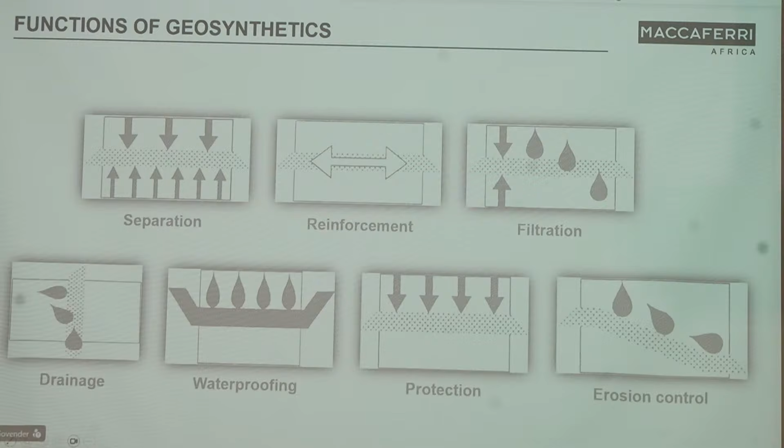We need to understand the function that is required, and the function would allow us to specify the minimum characteristics required in a tender document so that the contractor prices accordingly.

When we start looking at filtration, we then start looking at the permeability, and we're looking at the opening size.

On the technical data sheet, if I go back here, you'll see that each product supplied by any supplier should come with a data sheet with the specified norms in terms of it. Part of that, of course, is the component we've been seeing in tender documents all the time, which is the mass per square meter.

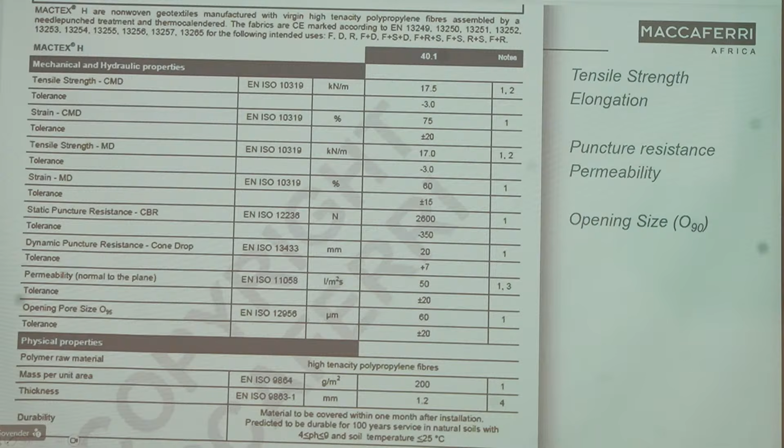I hope this helps you understand that merely stating the grams per square meter is not enough when doing a specification, talking about the textile.

The method of measurement is square meter. It's not roll, it's per square meter, not per roll.

You want to take out all the ambiguity when you're trying to specify your material. The basis of the payment - what are you including in it? Is it just the supply and not the placement? You define that as well.

And then in terms of the bill of quantities, how do you specify it in the BOQ? Geotextile for separation, as shown in the drawings, in square meters. That's generally what we do for specifying geotextile materials.

Hope that makes sense. Now, I've gone into a little bit of detail on this one. All other products, I'm not going into this amount of detail, but I'll just highlight the technical requirements for each component. So, a first example for you now - take out your phones.

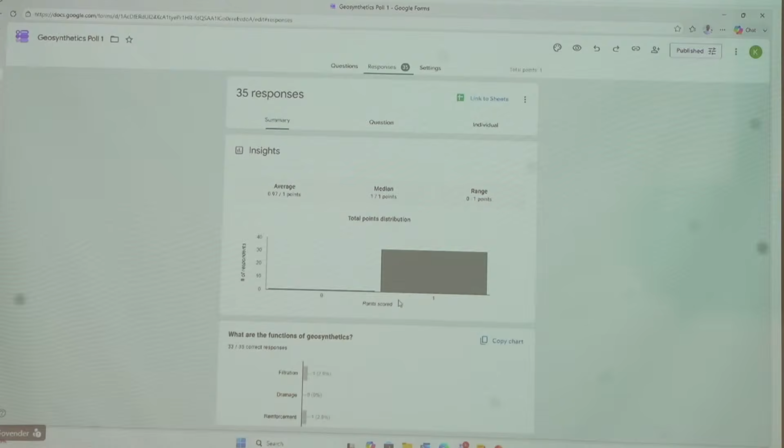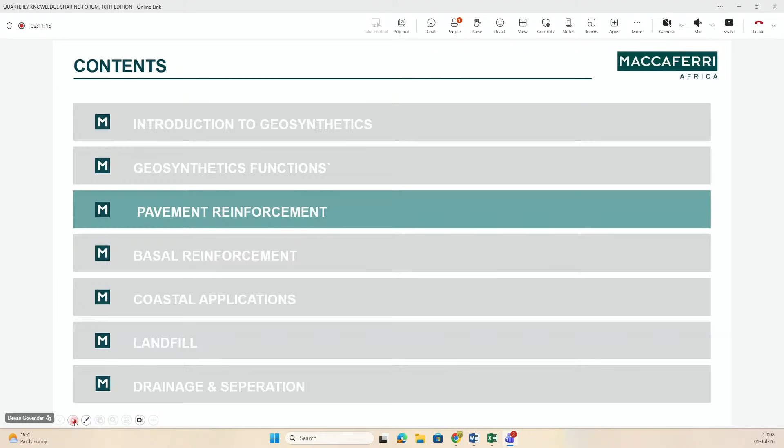Now that we understand the functions of geosynthetics and we understand a little bit about geotextiles, we're going to get into a key area for yourselves, which is pavement reinforcement. And when we start talking about pavement reinforcement, we can talk to separation, we talk to reinforcement, and we talk to drainage.

Now, when we're talking about a pavement, there's a number of courses that we're looking at. We've got the wearing course, the binder, the bituminous base, the base, and the sub-base. When we're talking about the wearing course, we talk about treatment, and there's a couple of solutions we could utilize. When we get into the base, this is where we're going to try and distribute that load. And when we're distributing that load, we're going to do that through reinforcement. Where we have a problem with water coming through, we can also start looking at separation and drainage solutions as well, which I'll mention as we go through.

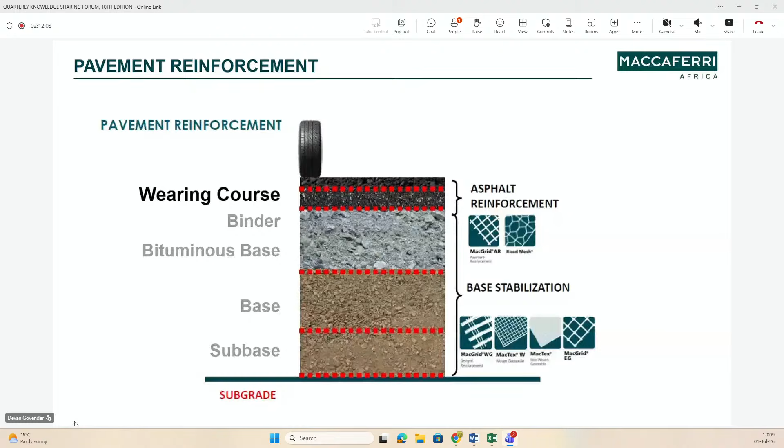So let's start by looking at that wearing course and what we can do in the wearing course. Now, that wearing course is meant to distribute that load. The other thing to happen on that wearing course is we need to make sure that it's sealed, so we get no cracks propagating up into the surface. Now, on the surface layer, it's a regular surface, it's resistant to vehicular loads, and it's got to be waterproof.

And when we get into the subsequent layers, generally on the base, we're starting to look at gravel, and there we're starting to look at the real load distribution. There needs to be good drainage as well in that area so that we take all water that's coming through from the top as well as water coming from the bottom out.

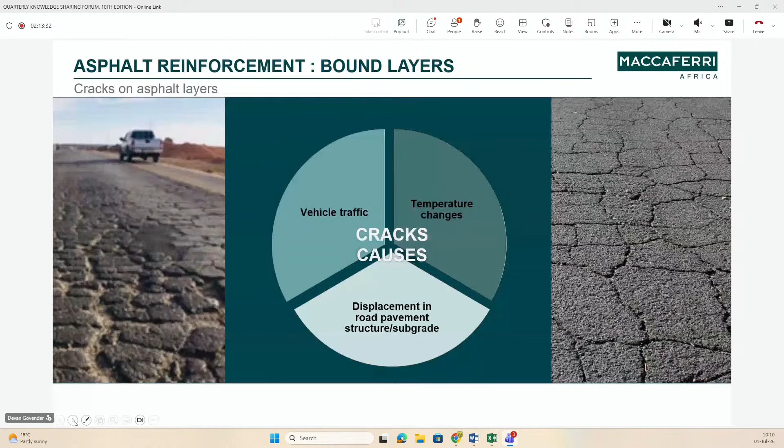Now, if we start looking at those bound layers, one of the key challenges with the bound layers is the cracking of asphalt layers. And across Africa, and I've worked across Africa now, I can tell you that this is a common space where we put down these beautiful roads. We've got this asphalt pavement, and then after some time, we're starting to get cracks. And cracks can happen for a number of reasons. They happen because of traffic, because of temperature changes, and because of displacement in the road pavement substructure or the structure. Now, when we apply a geosynthetic, we increase the service life of the pavement by preventing fatigue.

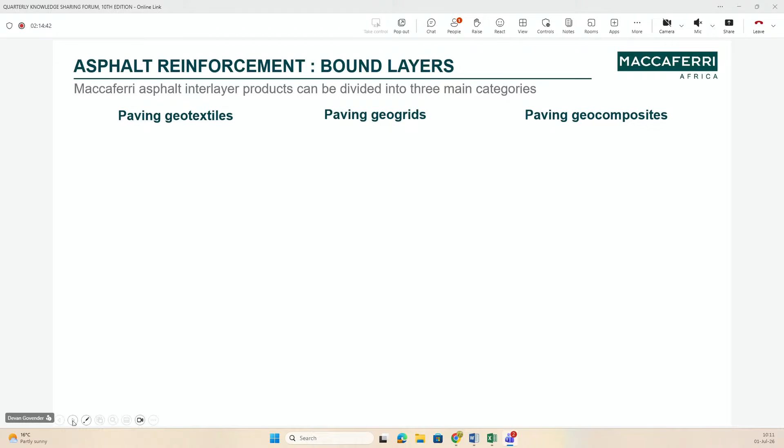Just moving forward. In terms of asphalt interlayer products, they can be divided into 3 main categories. Now, one of the things that we want to do with the pavement layers is we want to put in geotextiles that can be impregnated with bitumen. Now, when we do that, we allow for an impermeable layer. So as opposed to just putting a seal on the surface, we're now looking at putting in a bituminous barrier that can both provide stress relief and act as a barrier.

Then when we start looking at the pavement itself, we can actually improve the modulus of the material by putting in a grid into that material. Now, we've got to understand when we're working with these particular grids, if you're working with asphalt, you're working with high temperature materials. So our material has to be able to withstand those temperatures.

Now, when we look at the grids that are offered by Maccaferri, we combine both these functions. We could offer it just as a pavement material, so just a geogrid component, or we can combine both to offer what we call a geocomposite, combining the grid and the geotextile to give us both. If you want to use it, you've got it for sealing as well as for reinforcement.

Now, in those bound layers, this is where the challenge comes in. So you've got your layer works, but in there, if you've got any cracks, because you're going to have tires moving across the surface all the time, any crack that propagates is going to go into the surface. By introducing a geosynthetic into that layer, what we're doing is we're stopping the crack from propagating onto the surface.

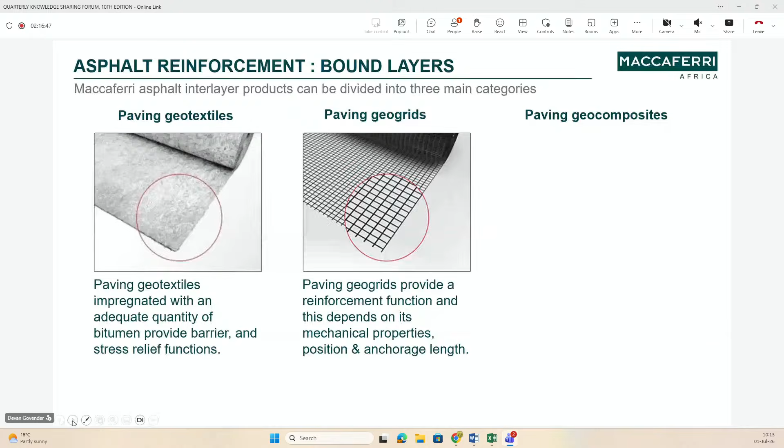Now, when we start looking at that material, we have woven geogrids. Importantly, we are talking about grids that are made from glass fibers, which can be used in asphalt layers that are about 35 millimeters. Now, they have a very high stiffness. The characteristic of the material is it's got to be stiff so that when you have deflection of that pavement, it reduces deflection. So it's still flexible, but it's reduced.

There is enhanced bonding if it is with a geotextile, because it is then impregnated with the bitumen. The advantage is that it reduces deformation, it reduces asphalt layer thicknesses by 10% and increases the service life by 20 to 30%.

An alternative product is also a steel product. So it's where we take our double twist wire mesh and we insert some rods into them. This allows us to have bi-directional strength of material. In the technical data sheet for geotextiles, there was a machine direction and a cross machine direction. So what we're trying to do is to make sure that we have strength in two directions. So with any particular synthetic material, we need to observe the strength in both directions, in two planes.

Okay. Now with road mesh, you can reduce asphalt thickness by 30 to 40%. I have to caution you, in Africa, our asphalt overlays tend to be around about 50 millimeters. If we're going in at that thickness or thinner, then the road mesh does not become effective, because the road mesh needs at least a 50 plus thickness to be able to add value. This is what road mesh looks like. It's used in asphalt layer works of at least 60 millimeters, I beg your pardon.

It's got a high stiffness value as well because it's steel. It's a three times increase in the pavement life. So that's the value that it adds. There's no weak interface, and because the wire strands are thinner, there's good interaction between the asphalt above and below the material. We've got very high resistance to installation damage as well.

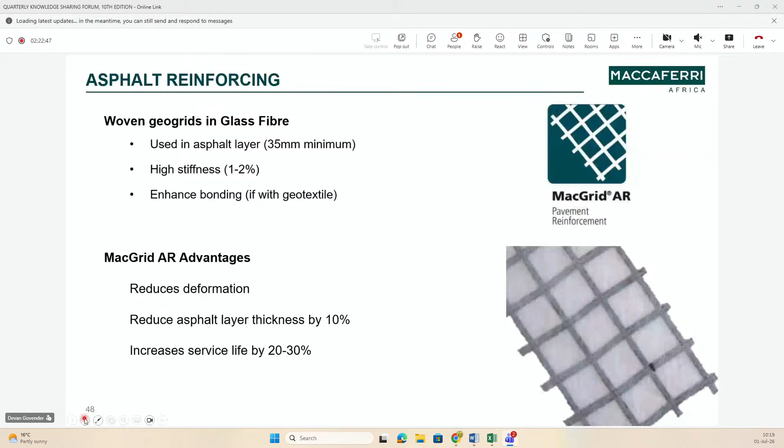So that comment about decreasing the load, it's the decreased net load per square area that's been applied on that material. Now, by putting in reinforcement, we make it spread out further. But we also start looking at separation layers to make sure that we don't get the materials mixing. Now, when we apply the design principles for reinforcement in the layer works, there's two key design approaches.

The one design approach is we say, okay, this is our layer that's here. We design it in a traditional approach, and then we introduce grids in there. By introducing the grid, we reduce the thickness of that material. So that's design approach one. Design approach two is we keep the thickness the same, but we increase the pavement life. So you can go, for instance, from 5 years to 10 years or 10 years to 15 years simply by introducing this material into your pavement.

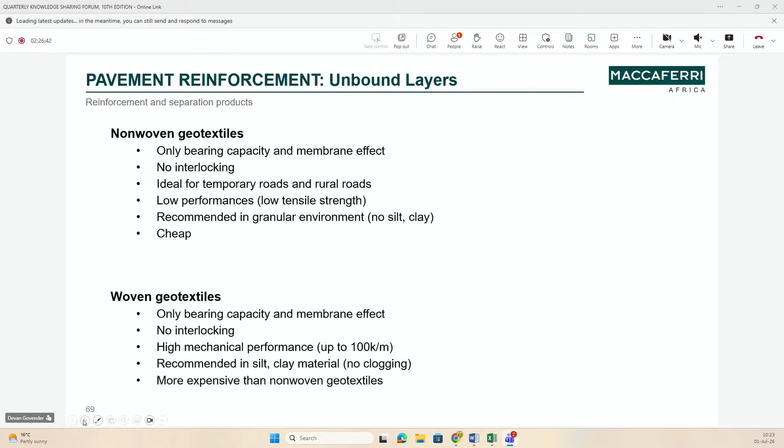Now, at the bottom of our layer works, we could have a problem with subsurface water. It's important for us to get rid of that water from our layer works as quickly as possible. Water will follow the path of least resistance, so if we introduce a component within those layer works where that water can go, then we're going to take that water out of those layer works.

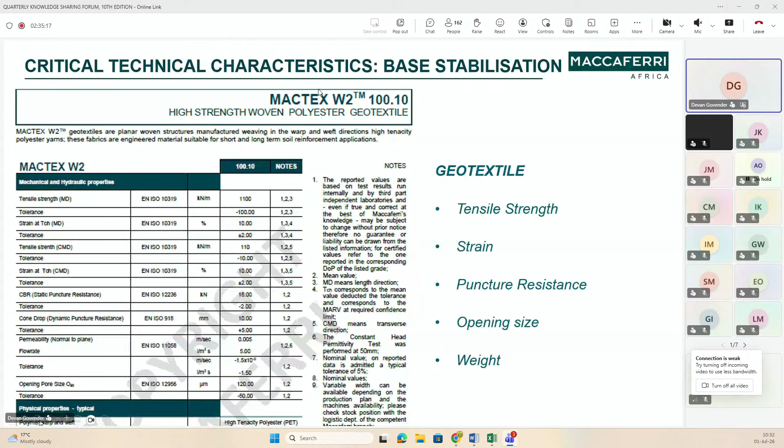Its thickness is very important in terms of the pressure, because we're going to be putting load on this material, so we need to understand how thick it is. Why is thickness important? That's the capacity of the drainage component. The mass is also important because it gives us an indication it won't break, so we've got to understand the tensile strength - its in-plane capacity, how much water it can translate with that thickness. What is its puncture resistance?

In other words, if I'm going to put a load on it, can this material handle it, or is it going to break my drainage medium? What's the flux normal to the plane? This talks to the permeability of the material - this is where it acts as a filter. Before the water gets into my drainage core, I need to make sure it keeps the soil back. So this talks about how much water is allowed to pass through the geotextile, and related to that is the opening size of the geotextile. On the other side, where it's impermeable, we need to look at how much water it'll prevent from going through.

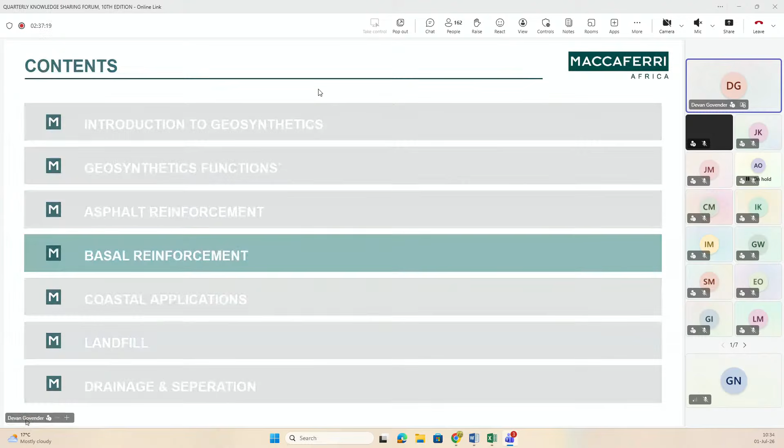On the deeper side of your pavement, you now start looking at separation and reinforcement. What we're really talking about here is applications where we're building roads on very soft soil. It's not impossible for us to start putting down piles because we're expecting settlement, but when we do this, the spacing of the piles becomes critical. In some instances, we can get away with not putting piles at all. In other instances, we can look at just increasing the spacing of piles to the extent where we can almost get rid of it in certain applications. It's important for us to understand those limitations.

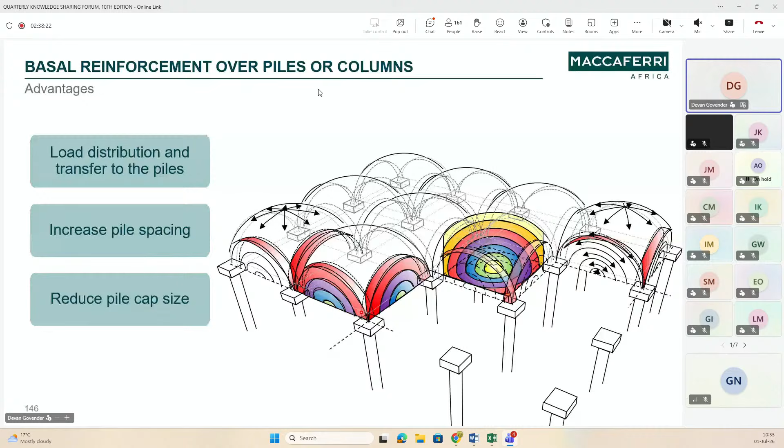Now, when we're talking about embankments on piles, what happens is we're actually creating this catenary arch, where ultimately the soil would fail or disappear, and then this soil becomes self-sustaining - it'll actually hold that load on its own. Without reinforcement, there's a very specific distance we can keep for that arch to form. With reinforcement, we can increase the spacing of those piles, therefore decreasing that cost.

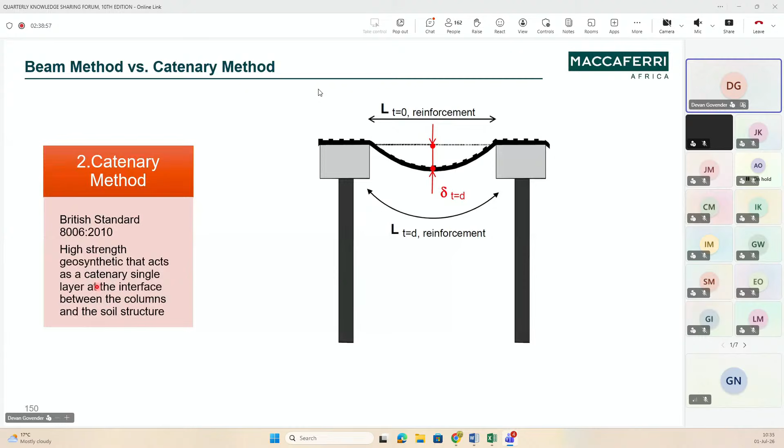When designing that, there are two methods we could apply. We could design it as a beam method, per that code, with multiple layers of low strength geosynthetic reinforcement, equally spaced within granular fill material, to average a beam across all of these piles. Or we can use the catenary method - that says we actually put in a geosynthetic, allow that deflection, and then it forms that catenary arch that eventually becomes stable.

When doing that, we can use a number of different methods, including biaxial geogrids with polypropylene with a maximum strength of around 40 kilonewtons per meter, or we can use a uniaxial geogrid with slightly higher strength, up to 1,500 kilonewtons. Alternatively, you could also use geotextile - there are a number of geotextiles that have good strength.

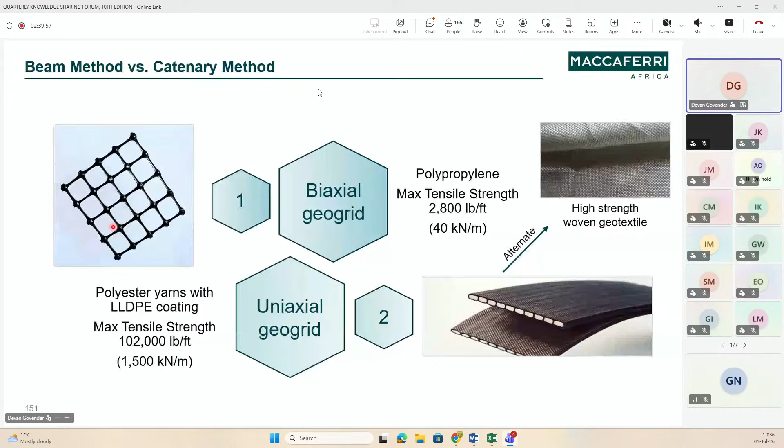In my experience working in Maccaferri in the UK, what we did was we had a primary reinforcement and a secondary reinforcement. The primary reinforcement were strips of geosynthetics running perpendicular to each other over the pile caps. In between, if there's a pile cap here, looking at plan view, pile cap, pile cap, pile cap, pile cap, your strips of geosynthetic will run across like this and like this. The section left empty becomes your woven geotextile as a secondary reinforcement. So there is a method to design around that.

In terms of the differences of methods, when looking at installation techniques with regard to the beam method, remember that the beam method is several strips of geosynthetic. On the catenary method, you come in and put your first layer of high-strength geogrid. On the left-hand side you see the beam method, then you come in with a selected fill layer. On the catenary method, you're already looking at your second layer of geogrid in the perpendicular direction. If you needed multiple layers, you would continue, and on the left-hand side, as you're going through, you're coming through with multiple layers. On the right-hand side, you've already reached and completed your layer works.

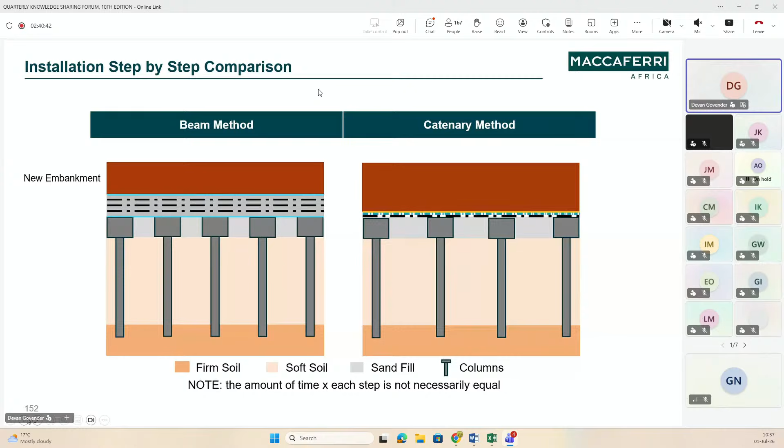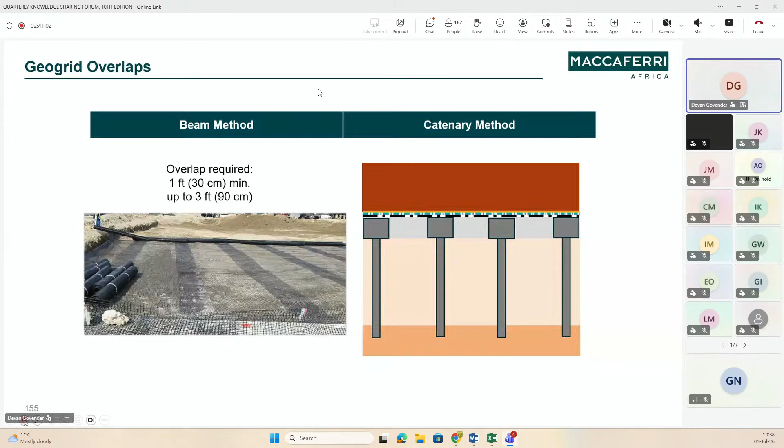So the advantage of the catenary method is certainly a time-saving component that can be applied when going with high-strength geogrid. The next couple of slides highlight the difference in time and the ease with which you can actually do high-strength geogrids. Maccaferri can do both. We do advocate the catenary method, and I'll talk about that a little bit more in the MSEW lecture that I'm going into shortly.

With the beam method, you need to actually put in overlaps. With the catenary method, there are no overlaps. So there are some other advantages in terms of that. With structural fill, you have to use well-graded material between the geogrids. With the catenary method, you don't go with structural fill - everything's above the reinforcement.

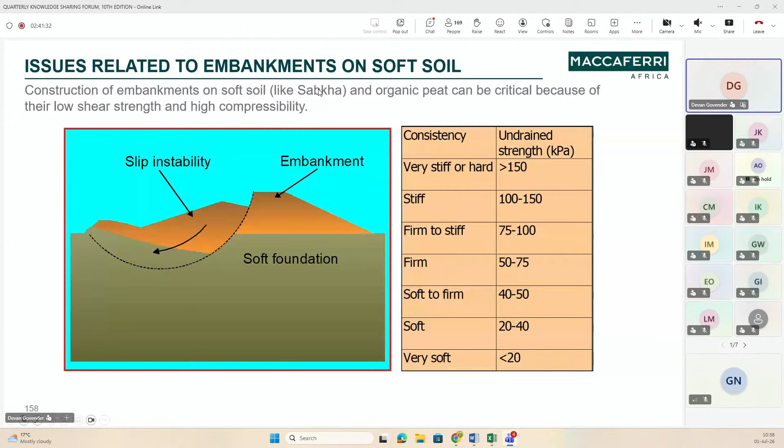So a practical example for you: what we're doing in roads is we're not talking about the pavement layers now, we're talking about the earthworks. Essentially, when we're getting into the earthworks, the challenge is what you see on the screen right now. We've got soft material on which we are placing our good quality fill material. The problem is that material is so soft that I can get failure right through my good material into that soft material, and that's what I'm really designing for.

Importantly, what we are doing is we're not designing for serviceability, we are designing for global stability. A good example to explain this concept is a project here in Oman. There was a road that was going to be constructed quite near the waterline, so you can see that the water table is very, very high, with some ships in the background there. The solution here to get onto this embankment was to look at stone columns, on which they would put in this beam and then come through with the platform above that. As an alternative, Maccaferri looked at this catenary method, putting in this geogrid, in fact losing the stone columns altogether, and then coming in with the building of the road.

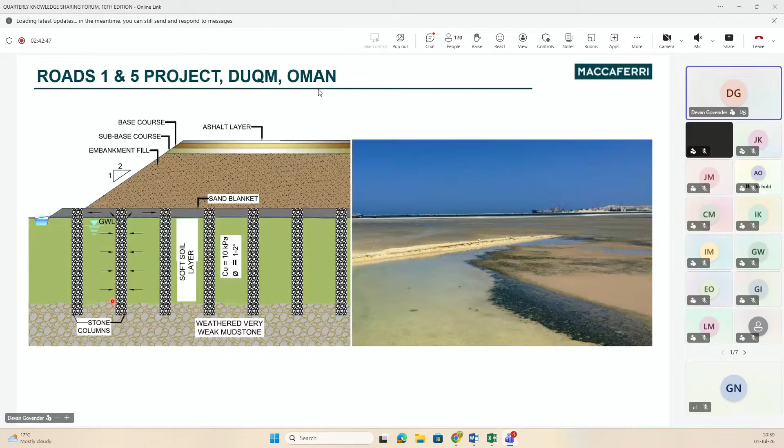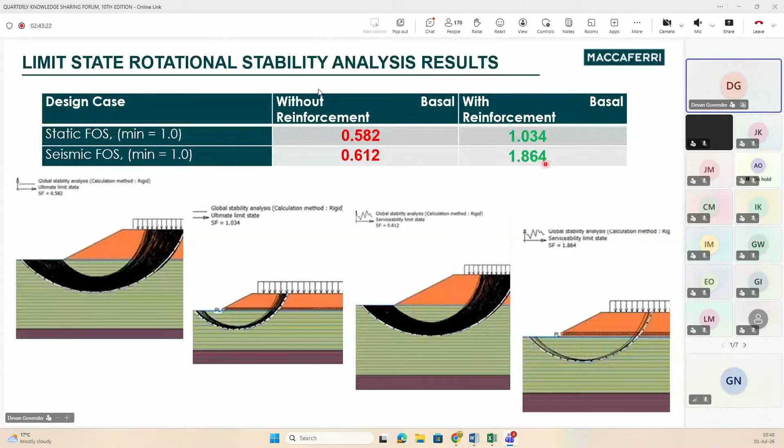When design and analysis was done, we would typically go through local stability, lateral stability, foundation extrusion, rotational stability. Then we also did a check on excessive settlement, just to understand what to expect with regard to settlement. It's there for global stability, although settlement calculations can be done. In this instance, from a global stability point of view, there was no problem with increasing the factors of safety above 1. The problem came in when we started looking at settlement, and on the settlement side we expected in one particular section that there was going to be settlement of 354 millimeters over a period of 175 days. So again, I want to emphasize this product was not utilized for settlement - it was used for global stability challenges.

So to circumvent that, what we did was construct the embankment and allow it to settle for 6 months whilst we continued the earthworks across the other sections of the road. After the 6-month period, we had that settlement, then we came in and did our layer works and continued and completed the road. That's how we accounted for that. It's an important note to understand that all synthetic materials, in fact all engineering materials, have limitations.

Just like concrete, we understand the limitations of concrete. We can't put concrete everywhere without some help. Concrete, we've got to put in steel for tension. And that's what we need to understand even with geosynthetic materials. They do have limitations. It's important for you as an engineer to understand those limitations and how to work around that. The example I'm showing on the screen is a classic example of how that was done.

So that project in pictures, you can see the really poor material. I hope this was showing clearly on your side. You'll see water pumping up as they put dump rock down, and they were trying to ensure that they got this formation layer in place.

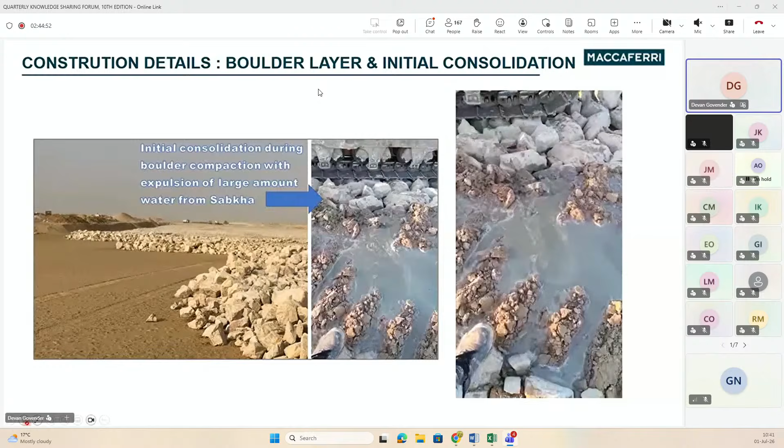Even after we put the material down, you see how nice and spongy that is. As you see this roller going over that material, you still see a very spongy surface that's there in terms of what has been formed. So that's how poor the underlying material is.

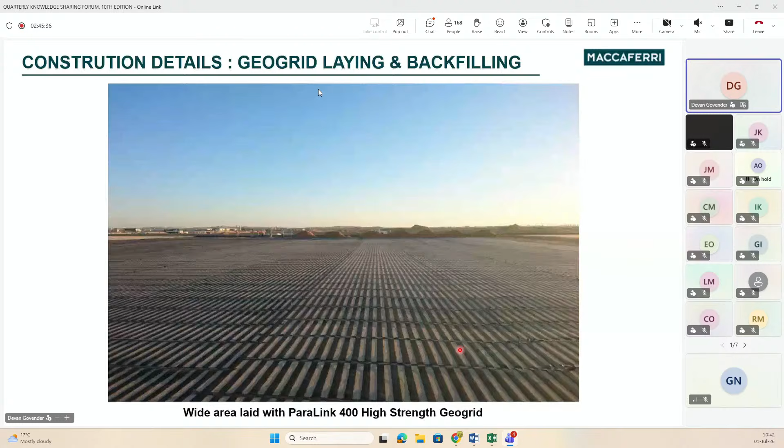Once that was done, note that they hadn't put a separation layer, so that material can get mixed into the underlying material. We then place the ParaLink material down. You can see this is a ParaLink 400 high strength material. It's a molded material, so there's strength in one direction. If you want strength in the other direction, you need a material particular to that as well. This is the backfilling and compaction activity, the laying of the road base, and the completed road.

In terms of the benefit, it's great talking about these things, but let's look at the cost of the project. The application of stone columns was going to come in at $78 per square meter. Our solution came in at $10 per square meter. So quite a significant saving offered to the client.

Again, I'm going to go back to the statement I made earlier: cost benefit analysis must be done on each and every single project. It's good engineering practice. So I'm not saying to you, because I'm talking about geogrids, that it's going to solve every problem. We need to be aware of it and how to actually utilize that.

Another example can be seen here, also under building. This is an extraction, an LPG extraction project. They're creating these large storage buildings or structures, and the underlying material was fairly soft. So what they wanted to do was try and make sure that there was no global stability issue. This was the finished grade, the placement of the ParaLink geogrid, and then the cross-laid layer.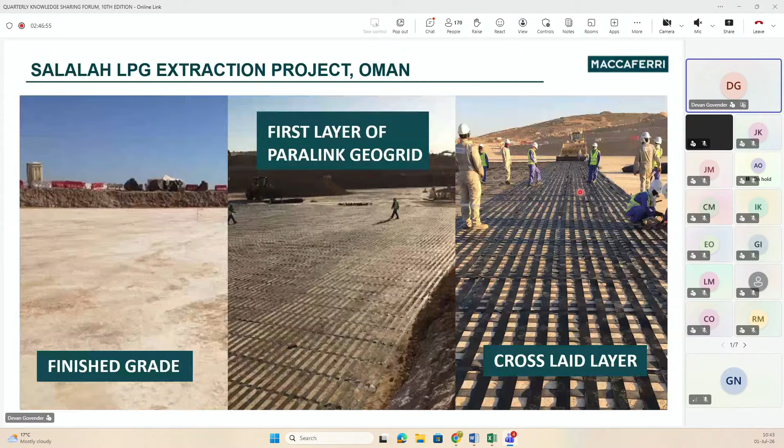What's important about this is, as I said, it's monodirectional. So here you see the placement in one direction. If you look very carefully, you see the steps in that direction, so it's two directions that material was placed. That's the circular concrete raft foundations completed, and that's the structure coming up. This is the tanks that were constructed, and the completed project.

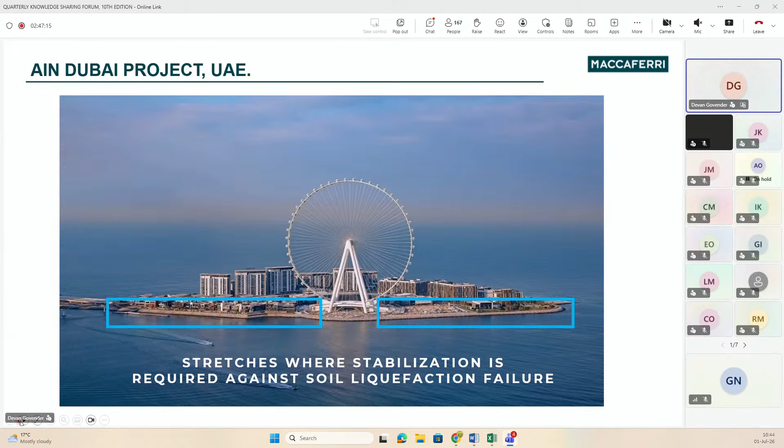Another project that could be utilized, not quite basal reinforcement but also an application where we're looking at reinforcement, is this high-profile project. Here we had the problem of stabilization against liquefaction. I'm not sure what's going on, I think some of my images are not coming through. Here we go. So here we've got, they tried to look at four separate scenarios because they were increasing the height of this island. They had the possibility of liquefaction and failure of this embankment.

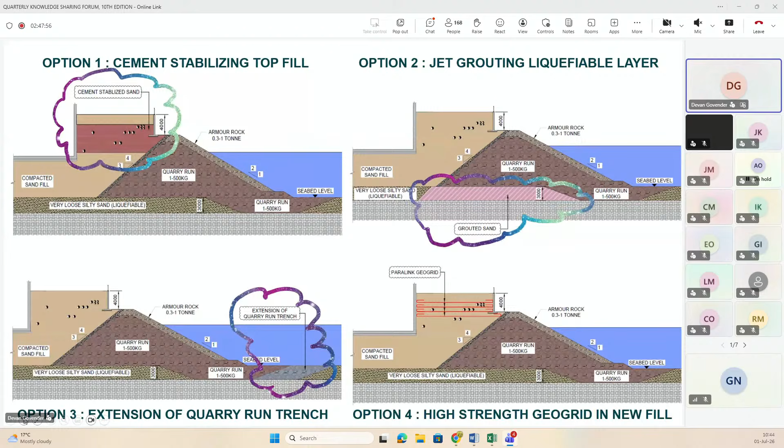So just to give you an idea, whilst we're working on roads, there are other things that interest us as civil engineers that we can actually apply in our day-to-day practice as well. Another project here in Durban, where I'm based in South Africa. Here they were constructing right next to the ocean, trying to create a storage facility that would stockpile soya. This was the underlying material, very, very poor material.

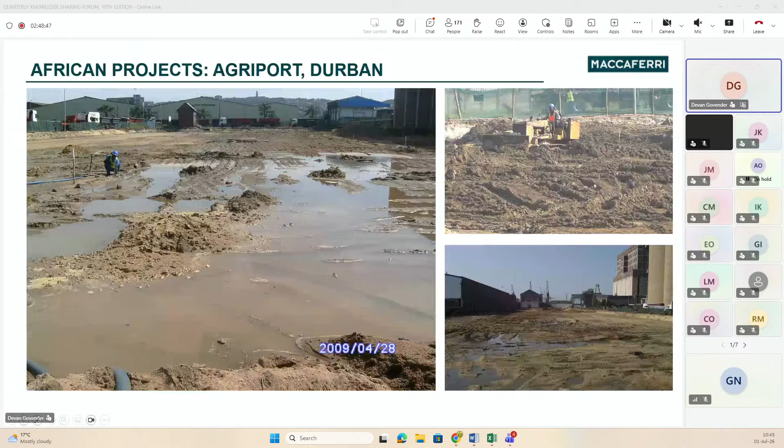From that perspective, I think I'm going to ask you a question here that you're going to put into the chat. Let's see if you can just get your blood flowing before we get towards the end of this presentation.

I don't think I've got it.

So you can see here, that is the picture I showed you earlier, geotextile at the bottom for separation, and then we've come in with the clean river sand above that. Once we've done with that, we come in with the geogrid that's unrolled across the surface.

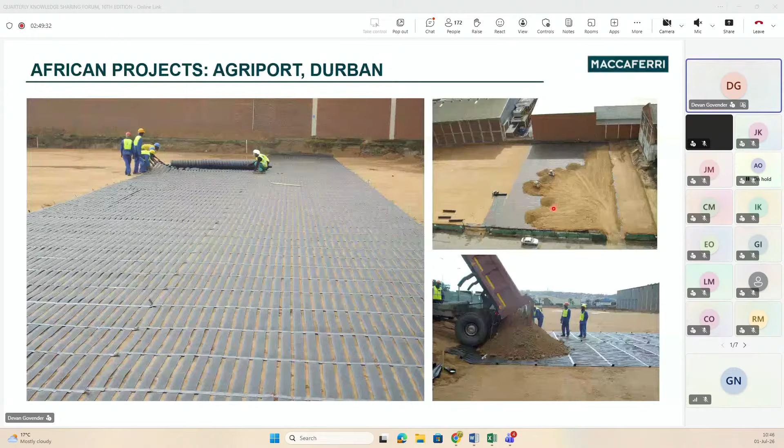One of the things we do when looking at geosynthetics is make sure we protect it against damage, which I'll talk about later in the lecture. You can see we place or tip material at the side, and try not to ride on the surface directly. We ride on the fill, tipping and pushing away so we don't ride directly on it and limit damage to the synthetic material. I love this picture because it shows bidirectional strength of the material - strength in this direction and in that direction.

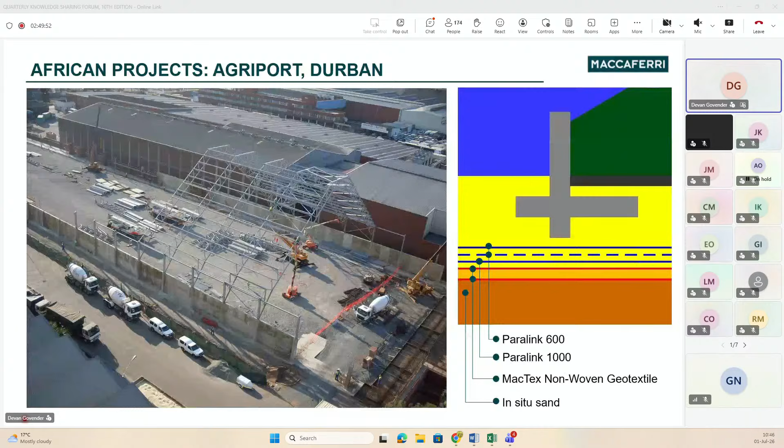This was then the superstructure coming through with the different components of the application. You can see a number of different applications of geogrids applied in embankments and along buildings as well.

This was the component I spoke to you about when talking about embankments over piles. We can also extend and integrate that with mechanically stabilized earth walls and structures, which I'll cover in the next lecture. When we're talking about basal reinforcement, the critical components are the tensile strength, the aperture size,

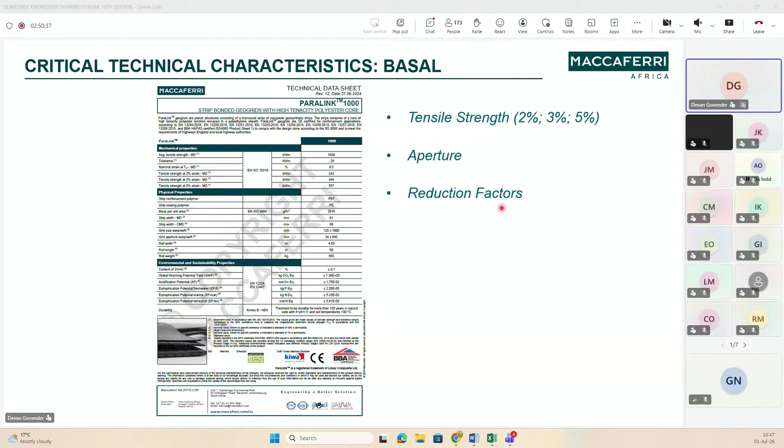and the reduction factors. Now, I want to go back there a moment - reduction factors are a key component that must be considered when looking at soil reinforcement and basal reinforcement. I'll cover that as well in the next lecture when I talk about the reduction factors for the materials.

I'm going to go through the next couple of sections fairly quickly before I spend time on drainage and separation. On the coastal side, we start looking at separation, reinforcement, protection, and erosion control. We also look at containment, the component I spoke about earlier. The challenge here is actually erosion caused by wave action, and it is detrimental to all infrastructure along the coastline.

MacTube is a type of product that's ideal for coastal regions because it's UV stabilized and can utilize existing beach sand or beach sediment to fill into the particular units. The way it works is you pump material into these bags. What happens thereafter is water comes out of the bags and the solids are left in these bags. These are fairly large bags that you can see.

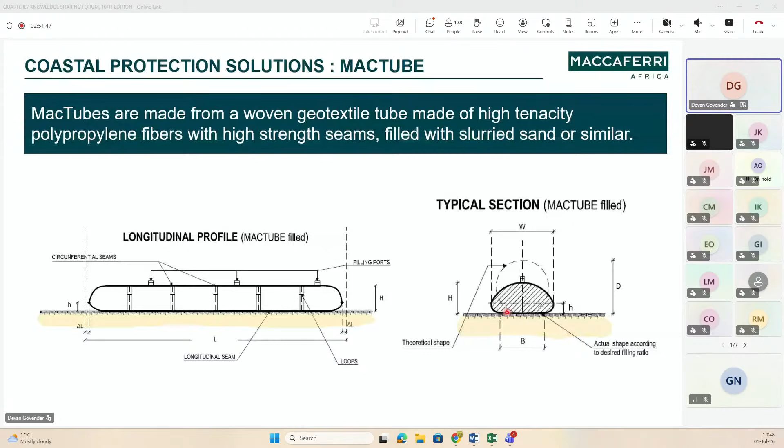These are utilized, and they put in. There's a number of filling ports that you have. You pump material in. We stitch them as circular units, but then they end up in this oblong shape that you see on the screen. That oblong shape generally has high durability. It's UV resistant as well. It does protect the coastline, and interestingly, there's different design concepts we can apply.

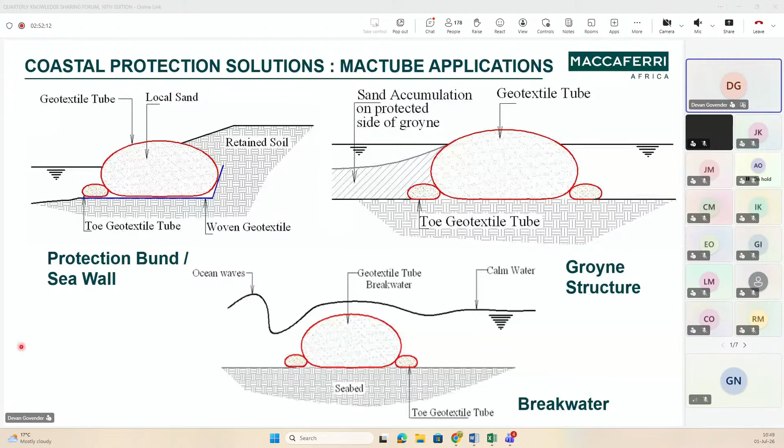Very much like retaining structures where we'd have toe protection, we can make sure it's adequately toed in on both sides so it can act as a breakwater in coastal environments. Design principles include looking at sliding, overturning, and bearing capacity. It's almost like looking at retaining structures in terms of how they're designed.

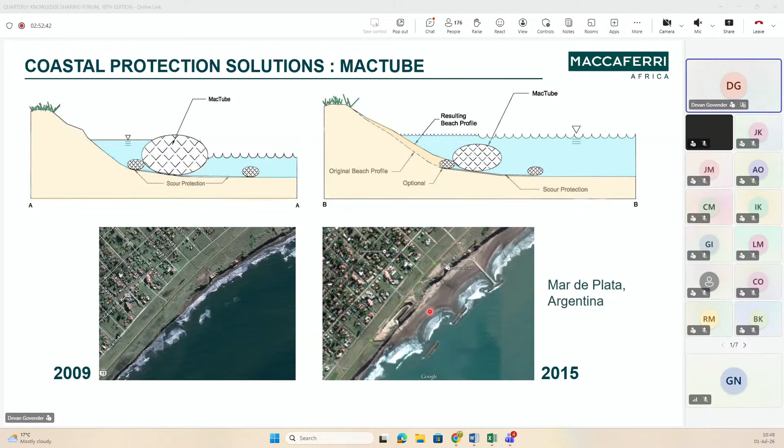A great picture here where MacTube has been utilized. You can see along the coastline some tubes that have been applied, and the protection we have here, and the buildup of the coastline over time. If you've got roads along the coast which you need to protect, this is a possible solution for you in those particular areas.

We also get involved in landfill as well. I don't want to highlight the landfill itself, rather the application that's going to be highlighted in this section. And here with the landfill, you can see a number of different things that are coming out.

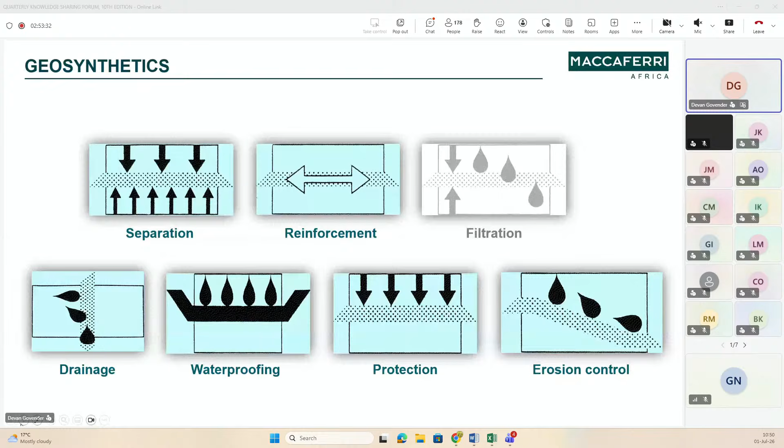Functions of separation, reinforcement, drainage, waterproofing, protection, and erosion control. Now, when we talk about that on a landfill, the key thing here, the currency that you talk to with landfill, whereas with roads you can talk about kilometers of roads, with landfill we talk about volume of waste that we can store. So when we're looking at that, there are a number of areas that we can get involved in.

We have the bottom lining system. So when we look at the bottom lining system, let me see if I can click on it. Let's just go in here. All right, so we have a top lining system. On a top lining system, we have what we call a multi-composite. We can combine multiple geosynthetics together. This allows for drainage. It also allows for reinforcement on the top of the structure, the capping of this landfill. So there is a product like that.

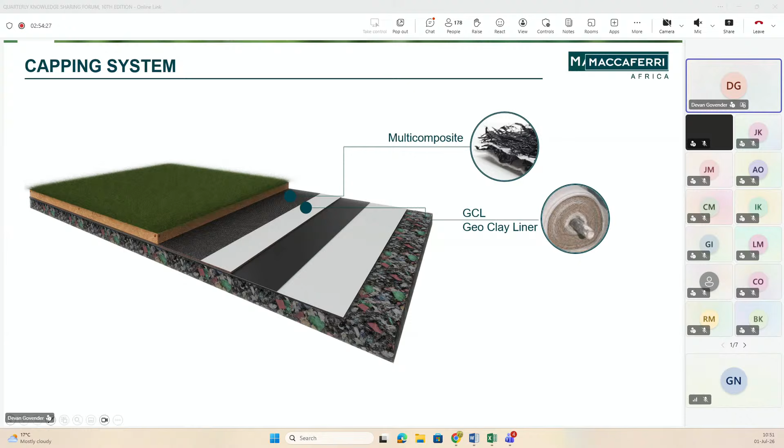There's also another type of product that's a clay liner. This is an impermeable liner. Okay, so you have an impermeable liner, geosynthetic clay liner. You also have HDPE liners. All of these are membranes that prevent water from going into the landfill. And then finally, to protect it from any water that does come through and also any gas that needs to come out, we have a drainage composite like we saw in the roads that's allowing things to go into this core and then exit, not translating into the material below or above it. All right.

When we start looking at the bottom of the system, here we don't want the leachate or anything to go into the underlying material. So here we've got things like the MAC Drain again. We look at MAC Tex for protection. Below the MAC Tex, we have an HDPE liner. So you've got a liner that's here, but I want to ensure that that liner does not have any holes in it. Now, great when I start, but after I start putting the waste in, I could have sharp objects that are going in. How do I protect that lining system?

And so I use the geotextile as a protection. So here, the geotextile must be fairly thick for me to be able to protect that material. And then as I go further down, I can use a clay liner as well underneath to prevent any material that comes through from going into the underlying material.

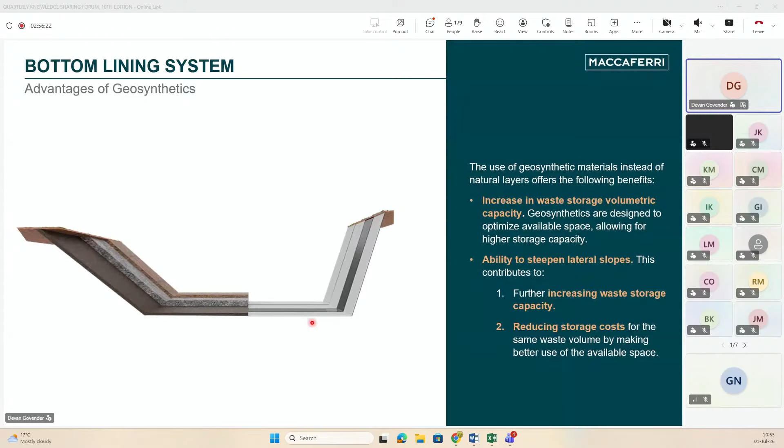Importantly here, I said the currency is actually volume. So when I use traditional materials like clay to prevent and limit the leachate from going to the underlying material, you can see the volume that it occupies. But on the right-hand side, the system's a lot thinner, so that means I'm increasing the volume, and that's the major currency that we look at when we start talking about landfill.

So here we've got water, contaminated water. Now we need to make sure that that water does not permeate into the surrounding natural groundwater and contaminate it. So here we're putting in a lining system like an HDPE membrane to try and make sure that we cut it off. Finally, as I spoke to you earlier on about this, there's a capping system.

The capping system is actually this geogrid. It's a multi-composite. You can see this is a geotextile, and it's a non-woven geotextile. We then have a drainage core. This is to allow water to flow through it, so there's that function of drainage. On the top here, we've got another mat product. But if you look very carefully, you'll see this continuous strand here. That's a geogrid. So there's a possibility of combining several materials with each other to give you what is called a geocomposite, and that's what this is.

Quick question: what functions do geotextiles play in the base course of a road? This is just a recap of what it played. When we looked at the base course, this was not in the bound layers, it's the unbound layers. The geotextile was utilized for separation, and it could be used for drainage as well. So that's what it was utilized for.

Now, when we start talking about drainage, we speak about reinforcement. Sorry, where am I? Again, there's two parts of drainage that we look at. We look at overland drainage, and we look at subsurface drainage. Now, overland drainage is something that you cannot neglect from the roadside.

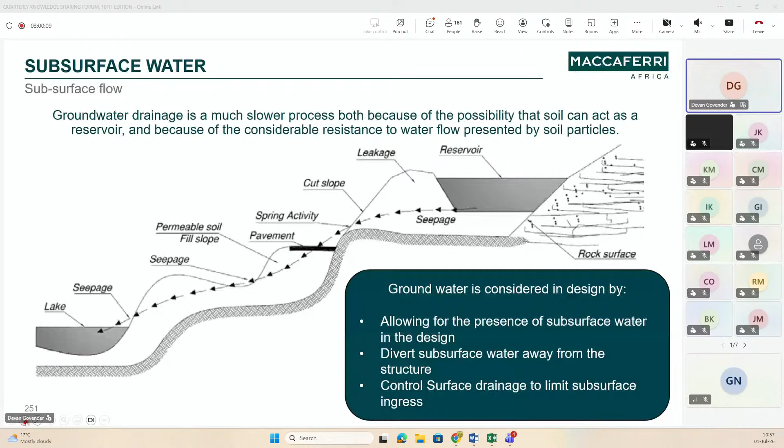There's a couple of characteristics that we look at in subsurface flow, including the intrinsic permeability and the hydraulic conductivity. Now, what does a designer have to do when he's looking at water? The challenge with water in there is that it's reducing or eliminating soil cohesion. It does produce horizontal forces if you're looking at retaining structures. It's lubricating your failure plane, and then it promotes uncontrolled movement of your soil particles, which is your piping. And then it can lead to liquefaction during earthquakes, which then translates into movement.

The designer has three choices. When they're designing, they can either design with that reduced characteristic of the soil, or they're going to look at putting in a drainage medium. And the drainage medium essentially is a three-phase design process. One is position it in the right place, make sure that you can allow the water to enter your drain, and then finally you've got to remove the water in time.

So because of that, where I showed you this drain previously, when we're talking about drainage blankets, we can replace that drain with just a drainage blanket that allows that water to flow through the material into a pipe and then exit the system. So it makes it easier to actually handle. We use what is called a drainage composite, which is what I showed you earlier on.

And what they then did was they looked at creating cardboard facing. So they had a facing, and they're creating reinforcement with cardboard. Then they created these strips. Those are the strips. There's your cardboard. So there's a positive connection between their reinforcement and their facing.

Then they've put it into that box and kept that timber facing in there, but they start filling up this box now with sand. As they continue, you can see they're compacting as well. So that's the similar action to what we would do typically on the ground.

And then we've reached the place where we fill it up completely, remove that timber facing on the front, and check to see whether this component can hold a bucket of sand. Now, let's go back to what we said earlier on.

Would you be confident standing on that mound of sand, that it would take your weight and not collapse? You can see what's happened just by using cardboard - we've actually enhanced the strength of that mass of soil. That is the principle of soil reinforcement, colleagues.

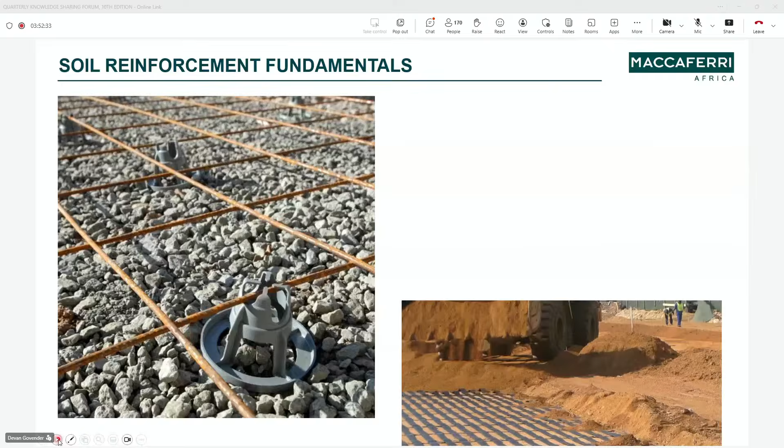Like you have steel that reinforces concrete, as I mentioned in the last lecture, we have material like this - your synthetic material, geosynthetics - that reinforces soil.

That is the reinforcement. We've got to understand its interaction with the soil, we've got to understand the facing, and we've got to understand the connection between the two.

Now, what principally are the design principles we're looking at when we talk about walls? There are a number of different design codes we can refer to: AASHTO, the Federal Highway Administration, BS 8006, PS 8006, SANS 207, and Eurocode 7.

Those are the codes you can utilize when looking at mechanically stabilized earth walls - MSEW, MSE. The two codes I'm referring to today in this presentation are BS 8006 and SANS 207. You're welcome to use any of the others, but for the purposes of setting a platform and creating some ideas on how to understand these concepts, I'll be talking to those two.

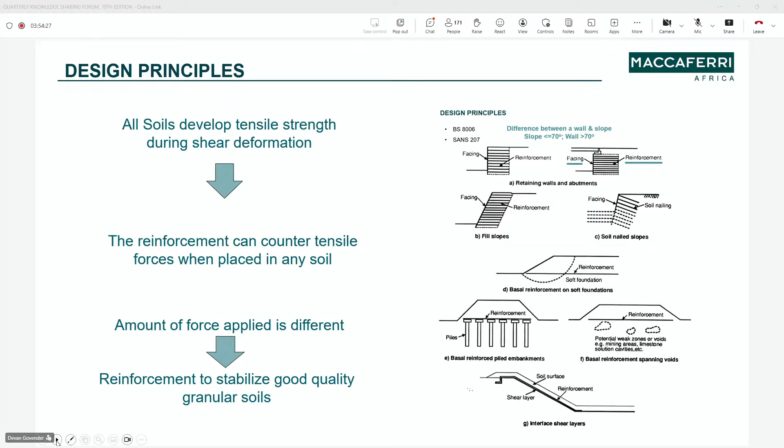So here we talk about slopes. When we talk about walls and slopes, we're talking about retaining structures. What's common here, as you can see, is a reinforcement and a facing - so you have walls and you have slopes.

Very quickly, for those that didn't see the whole of that slide, and those that did not attend the first lecture I did a couple of months ago - I want you to answer in the chat: what is the key difference between a wall and a slope? What's your take on the difference between a wall and a slope? Type it out in the chat.

How would you classify a structure as a wall, and how would you classify a structure as a slope? I'm going to go again - can we see if we can get at least one response today from the room? I'd welcome you to even walk around and ask somebody randomly.

Yes, I can see a few engineers whom I know by name. I can see Engineer Kidagisa - saidia hapa kidogo tafadhali. Thank you, Engineer, and they walk to the front. So Engineer Kidagisa is giving a response.

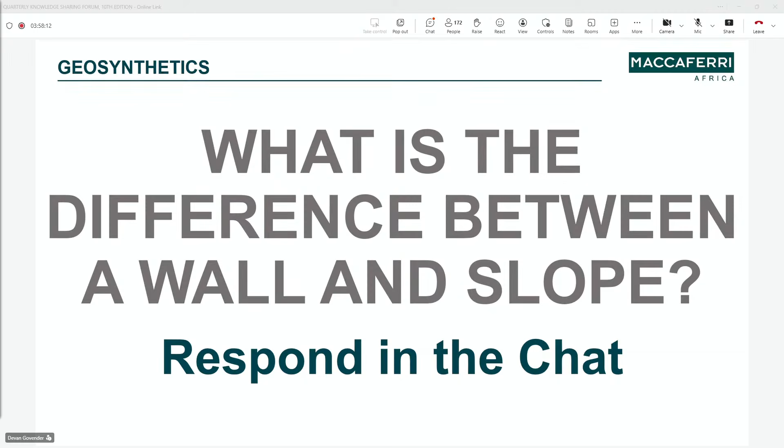So the answer is 70 degrees, and Alphonse, I think Owayo, you did get it right at 70 degrees. I hope that's your knowledge, and not that you read the slide very quickly, because I had that on the slide previously. So when we start, there's walls and slopes, and 70 degrees is the magic number.

When we look at other components, we talk about basal reinforcement, which I covered in the last lecture. We're looking at basal reinforcement on soft foundations, basal reinforcement on piled embankments, and also basal reinforcement spanning voids. The situation of voids is when you start having sinkholes. In Gauteng, South Africa, there's a prolific problem where we've got voids that occur all the time. We construct these roads, and all of a sudden massive sinkholes occur. I understand you could have similar problems in Kenya, where you can put a geosynthetic across those voids, or where you potentially see voids, to prevent these kinds of problems from occurring in the future.

The last area we talk about for reinforcement is interface shear layers. When you're looking at putting a thick layer of soil on a surface that is inclined like you see on the screen, this is where we now start putting reinforcement in. You'll remember at the end of the last lecture, I started speaking to you about clay.

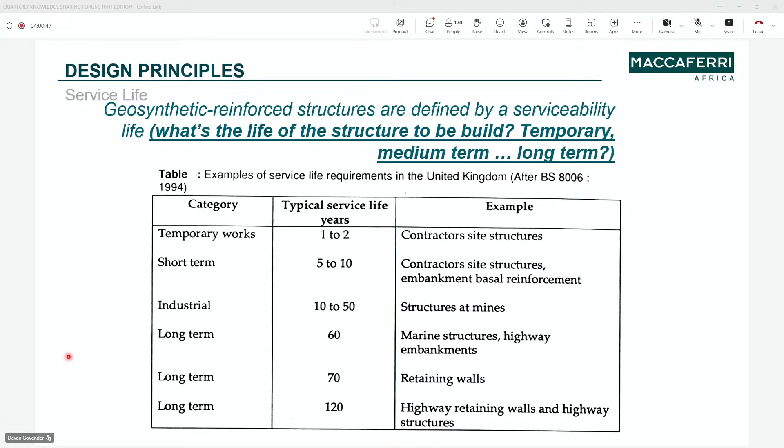Now, this is important because we need to understand what's happening with that reinforcement. How long does it need to last? And how is it going to perform with time?

Of course, we've taken in and factored in our live loads, and those live loads come into it, unless there's a significant volume increase. But largely, you're going to take a truck out and start putting a plane on the road, that's when you're going to increase the load. But other than that, the load is fairly consistent for what we've designed it for, okay?

When we start looking at embankments on soft soil, initially when we're building the embankment, it'll load and load and load. Then eventually, if it's in soft soils, there will be some settlement and the soil starts acting on its own. So it starts protecting itself, but the load will be applied, and then that load will decrease as that slight failure mechanism occurs. So there's some settlement, and then it actually reduces, the soil starts acting on its own.

When we start looking at piled embankments, you load it, then you get that arch that occurs, and then you get a slight decrease, but the material does start taking load first before that load decreases and the soil particles lock in with each other and produce that arch.

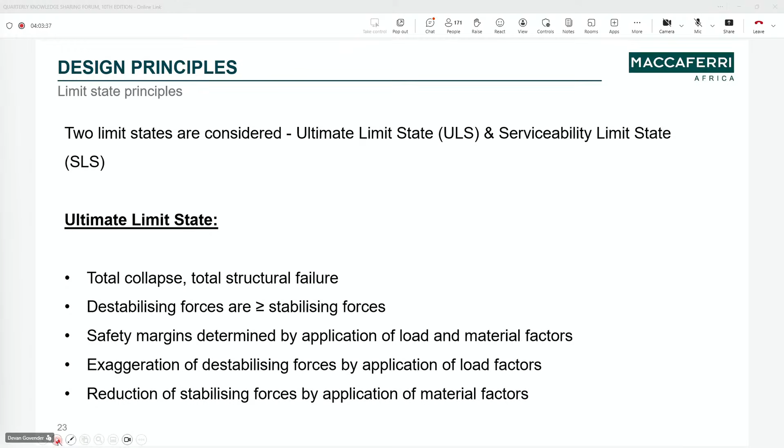When we're looking at ultimate limit state, we're talking about total collapse of the structure. Destabilizing forces are higher than the stabilizing forces. The safety margins are determined by the application of load and the material factors. There is an exaggeration of the destabilizing forces. So we're factoring up the forces, and what we do is we reduce the stabilizing forces by applying the reduction factors to each of the components related to the materials that are resisting that.

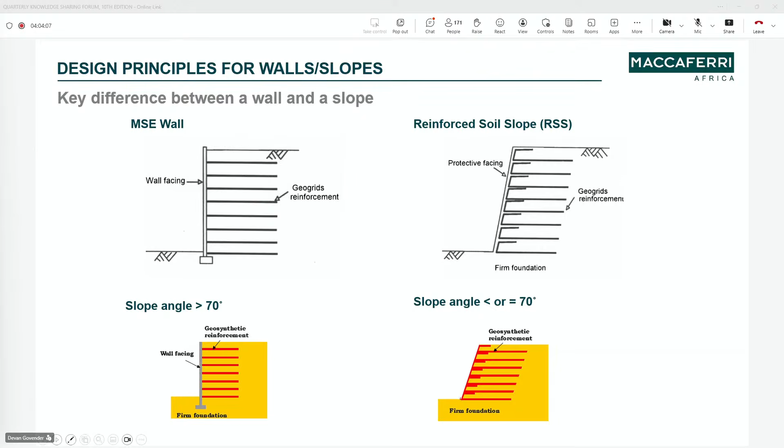Now, the key difference, as I said to you, is 70 degrees, and correctly pointed out by someone in the chat, and as I've spoken to you about earlier on as well. 70 degrees, that magic number.

Now, what that will do is those are the forces acting on the wall. We will test the wall for bearing capacity. We'll do things like overturning. What does it do in terms of overturning? We look at sliding. We look at global stability.

Now, when we're looking at walls and slopes for reinforced soils, we look at exactly the same thing. So we'll still look at sliding. We'll still look at bearing capacity. We'll still look at global stability as well, so the entire slope. Now, the change here, when we're looking at reinforced soils, is we start looking at internal stability. And when we're talking about internal stability, we now start talking about the reinforcement.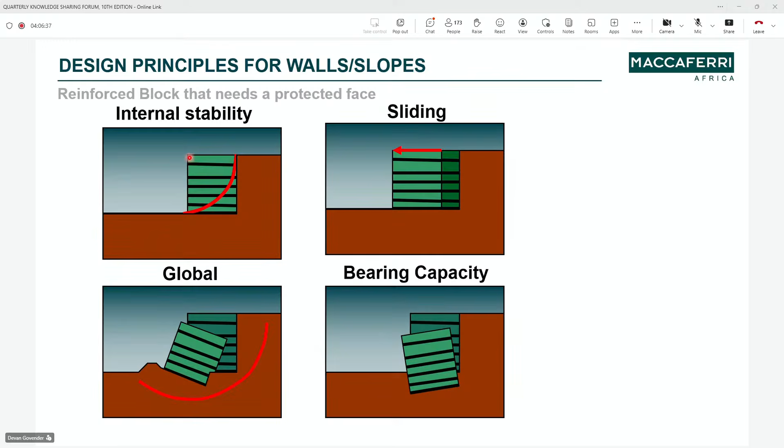Now, a useful rule to understand is a rule that applies not just to reinforcement, but it also applies to mass gravity gabion walls as well. The useful rule to apply is that that base width we start with is two-thirds the height. So whatever that height is, this width here is two-thirds h. Now, when we're doing the checks, we will do internal stability checks. We will check the maximum tensile stress that that reinforcement will take.

We will look at the reinforcement pullout to see how much force is needed to pull the reinforcement out of the soil, and we'll look at the facing connection test. Remember, there's reinforcement, facing, and a connection between the two. How much force is applied at that connection point?

There are different methods we can apply to look at the internal stability check methods: the tie-back wedge method and the coherent gravity method.

Now the design process: your inputs, your analysis, and your outputs. We generally input the geometry of whatever we're going to design. We look at cross sections, long sections, and any constraints such as culverts, barriers, and the road surface. These become your constraints in terms of what you need to do.

The other input parameters we need when looking at reinforced soils are soil characteristics. What are the soils underneath? What soils will we use for the structural fill, the material sandwiching the reinforcement? Where's the water, and how far up or behind the wall is it? What's the loading? Depending on where you are on the continent, we'll also look at seismicity, because that's a load that applies to the structure.

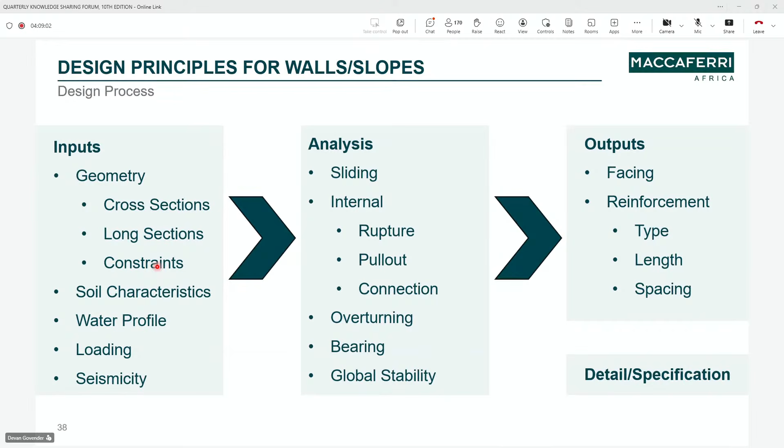What length is the reinforcement, and what's the spacing of the reinforcement? From that, we develop the detailed specification, as I spoke about earlier with the geotextiles and other materials.

Now we will look at the different components, as I said earlier. You can see some design principles of embankments—just a second, I hope I haven't missed a few slides here. But yes, this is some of what we'll start looking at in terms of design principles for these components. Now let's start talking about the reinforcement that goes into the embankment.

So, in any of these embankments across different applications, I said we're going to subject this material to a tensile force. This material has the ability to resist that force, so I'll go into a lab and test it.

In our design process, what we do is factor up the loads but reduce the strength of the material to look at the ultimate limit state design. How do we reduce those factors? This is not a straightforward process—it involves several considerations when we look at designs.

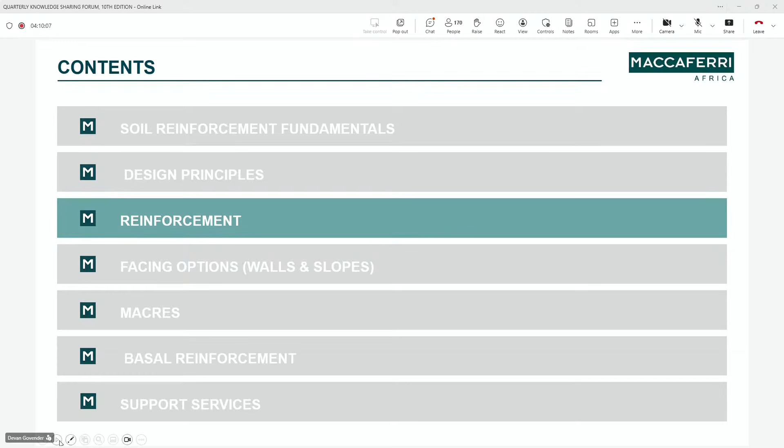That's the important question. It could be related to strength—we're not confident about the strength—but what about durability? What about the consistency of that cardboard? We could be very careful about how we lay it down to make sure it doesn't tear, but how does it interact with the material on the ground after installation? And what if it's a natural material like cardboard—what about insects?

Give me a product that I could utilize, such as a plastic gabion that could be used in Africa.

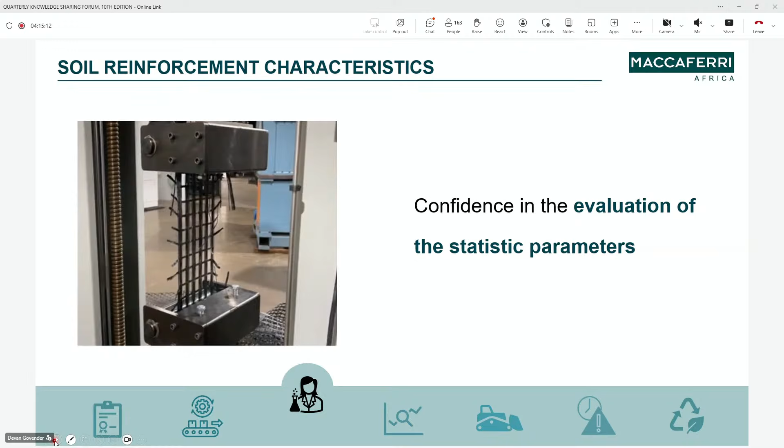The question to them was, what standards are you testing this to? They said, no, we do lots of standards here in China. But I wanted to know what were the international standards that were utilized. So, colleagues, these are some of the things we need to start asking of our suppliers. What tests are you using to actually test your data? Local ones are great, but we need those that subscribe to international standards. This creates uniformity and a degree of accountability with regard to those standards.

Now, when we test, I mentioned to you the design lives. They go from 1 to 2 years all the way to 120 years. Does it mean that we check the performance over 120 years? Does it mean that all goods that were not in existence for 120 years can't be sold in the markets? The answer is simply no, we don't do that.

What we do is we test what we predict is going to happen in the years ahead. Now that extrapolation process requires a lot of technical expertise to solve very complex solutions.

We are soon going to witness the implementation of the bridge across the Likoni Channel. It's a very complex project, and I want to urge all of us to pay a lot of attention. These things have been done elsewhere, but we are picking up the technology as we move along. Some of the discussions we are having today are very relevant, so I want to urge everybody to pay very keen attention.

So of course the size is linked to the size of the mesh, so it makes sense that there is something that covers that area. The geotextile that is utilized behind the gabions - by now you should know what a geotextile is. You either have a woven or a non-woven, and I'm hoping you remember that when we're using gabions, we're largely using a non-woven needle-punched geotextile.

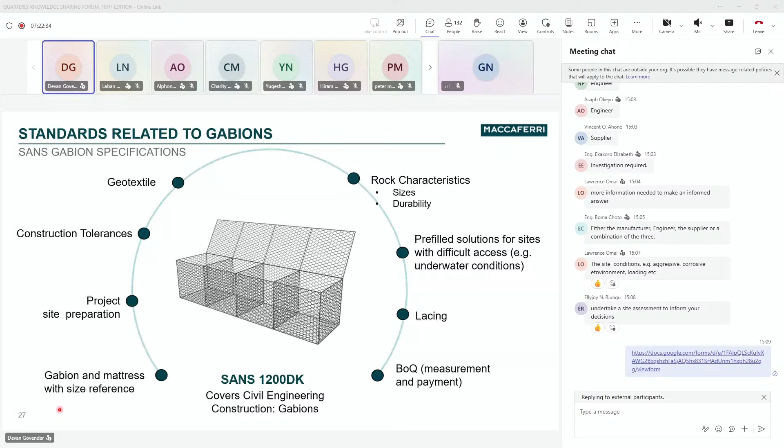That dimension there is the dimension between the twists, as you can see in the picture. And here, this is the size of stone that you could utilize for gabions. Ideally you want a mix of stone. You can't have it too small because it can come out through the gabion. You can't have it too large because you don't get the right density of the gabion. That as well is something that must be controlled when doing gabions.

This is the table that talks to the degree of accuracy or the tolerances that you're allowed to construct to. And then when you're talking about specifying gabions in SANS 1200 DK, you can see it says separate items scheduled for gabions of galvanized wire, for gabions of PVC.

The connections really articulate, so there's no need to change that really. The durability requirement was brought into question because when we're designing as engineers, we've got to understand the design life associated with whatever we're designing with. So whether we're looking at a glass grid reinforced pavement, a reinforced wall, or a bridge, we need to understand what that design life needs to be. So the shortcomings were across the board - there was no linkage to time.

The other key thing that happens is that we started speaking about corrosion, which is a chemical process. What happens if we take wire and put it into a wet environment where water flows? So besides corrosion, for engineering purposes, let's go back to where we started this today. I said we are all engineers, and as engineers...

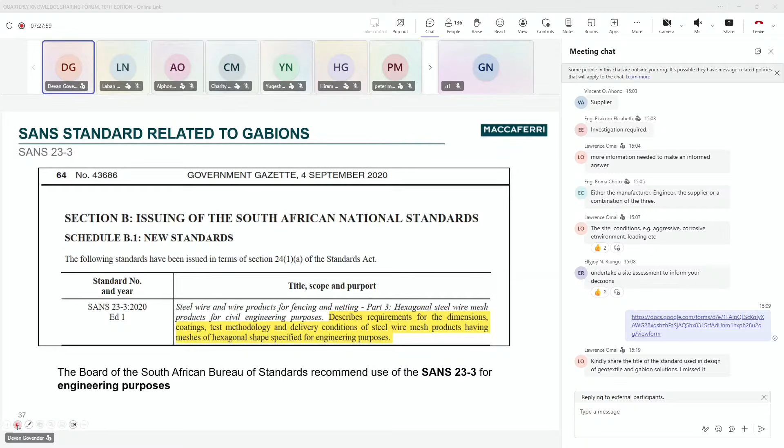If you were making notes wherever you are today, whether virtually or in the venue, take that note down - table A1 in EN 10223 - because that is a key design table that you can utilize to select your wire.

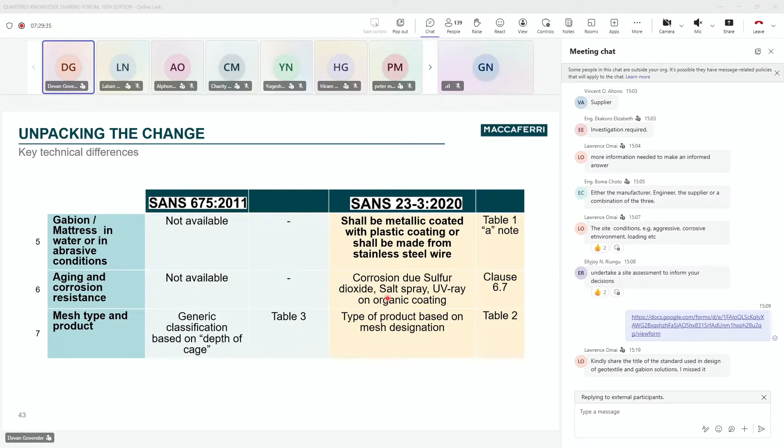Then in terms of the product definitions, it was only gabions and mattresses. Here we started saying that there's some specification when using it in wet applications: it must be metallic coated with the plastic coating. Aging and corrosion was included, and mesh type was generic. Now we're starting to talk about some other components that talk to the durability and longevity of the wire.

So where SANS 1580 was only talking to boxes, so some sort of rectangular shape. It had some shape, right? It's a box particularly. When we start talking to 23-3, we start talking about variants of products, so a variety of products, including TerraMesh, gabions, etc. All right, so it's enhanced that. So where 20...

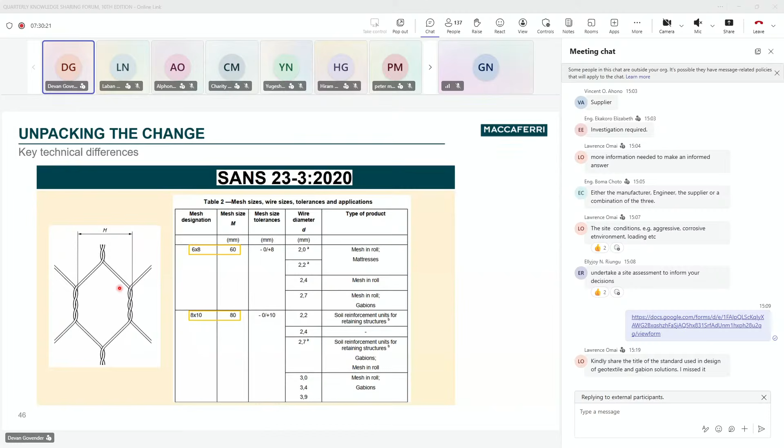Anything in excess of 25 years that's coming through, and depending on the design life, you then choose that. So how you utilize this table is you start with your design life. So you'll say, what is my design life? You'll also look at your conditions. So you'll define it in terms of the conditions that are here, and then you'll select those conditions.

I start with wet conditions, and in the temperate zone, so you start in this part of the table, and they'll ask you whether you want to go up to 120 years or in excess of 120 years. And then based on that, if you're sitting in this zone here, you can choose a product that's PVC or polyamide with the zinc aluminium coating.

All right. As much as it says that, Maccaferri is currently doing a product called PoliMac. Does it now mean that we can't market it in terms of this particular table? And the answer is simply no. There is an allowance for it in 23-3. It says more advanced organic coatings with an equivalent or superior corrosion protection may be considered in order to improve the assumed working life. So in this instance, we've got to prove that the coating that we have is actually better than other products.

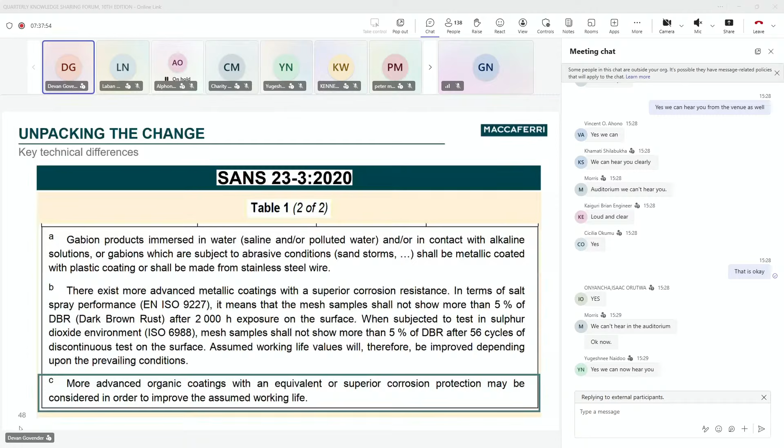I did mention earlier on about the welded product and the importance of distinguishing between a welded product and a double twist structural element. Now, going back to the PoliMac, as a company we've done some extensive testing on the PoliMac against our PVC product. In addition to the normal salt spray testing, Maccaferri has put our wire in a wet abrasion test. So we've taken it through like a washing machine, continually exposing it. At the end of this lecture, I'll try and show that to you. I've just taken it out because of time.

But after we go through a wet abrasion test, we then expose it to salt spray to understand how it performs under abrasive and corrosive conditions. Interestingly, PoliMac does perform a lot better than your PVC products. And I'll try and show you those slides at the end of this presentation.

Now, importantly, when we get to gabions, because we've got different types of coatings, we need to understand how to specify gabions. You can no longer just say gabions 3. That's not the way it works. There's a lot of color on the screen right now, but this is telling you how to specify a gabion. In your bill of quantity, you'd write gabion in accordance with, in South Africa, SANS 23-3. If you want to go to a European standard, you write EN 10223.

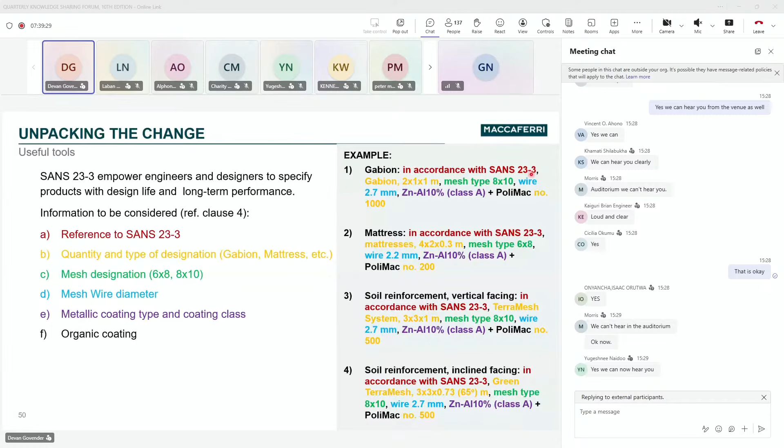Gabion, that's the type of unit. 2 by 1 by 1 is the size of the unit. This is your mesh type, 8 by 10. I spoke to you about that earlier. The wire diameter is 2.7 millimeters. Zinc aluminium, that's the metallic coating. PoliMac, this is your plastic coating. So all of those things need to go onto the specification when specifying gabions.

This may be said for gabions. This is the different wire diameters that you have. It could be said as well for TerraMesh units and Reno mattresses. And when I talk about Reno mattresses, it's important for me to also explain to you the changes in technology with Reno mattresses. Material flowing down. So when I say flowing,